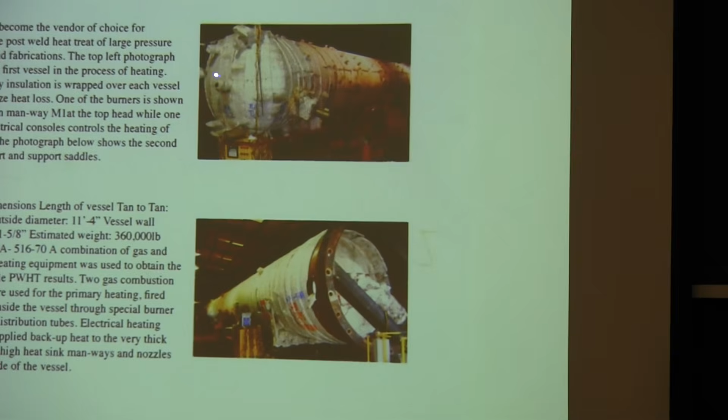Here's a vessel that they just wrapped. They put electrical blankets around it, virtually over everything, and then wrap the whole thing in insulation. Here's another one. If you search online, there's a bunch of pictures of on-site stress relieving.

And it has to be done - you either have to do thermal stress relief or mechanical stress relief if the things get very large, because the residual stresses get to be huge. I told you the story about the big weld with 400 little welds in it, from a piece that came off a 50,000 ton forging press.

They didn't do proper preheat or post-heat. They didn't stress relieve. They didn't peen - where you hit it with a little hammer every half inch of weld, going in and beating the surface to introduce mechanical stress relief by deforming the surface. That's the way we used to put together battleships with 14-inch thick armor. No one remembers exactly how to do it anymore, and no one wants to build a battleship just to prove it. We don't really know how to weld 14-inch thick armor steels anymore, because all those people are dead.

Did I tell you about the battleship Iowa down in Puerto Rico? One sailor was upset with another, so he set off a shell in the turret and destroyed it. The Navy didn't know how to repair it. Of course you don't need 16-inch shells anymore. They were firing shells made in World War II, and the last time we fired shells was in the 1980s, sitting off Israel, lobbing them into Palestine or Syria somewhere.

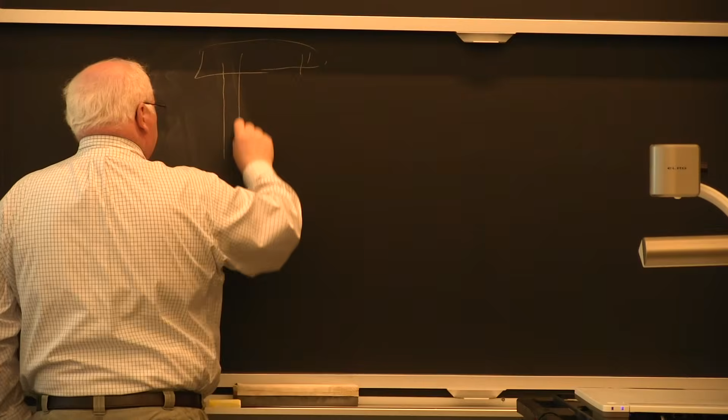But what happened at the Wyman Gordon plant, they had the press go up about 3 or 4 stories above the ground. When you walk into the plant, you've got these great big 4 rods. I'll just draw 2 of them. You've got the ground, and this goes up about 3 stories, 30, 40 feet high. And you've got this big set of beams up here. There are like 6 of these I-beams, and they're 10 feet high.

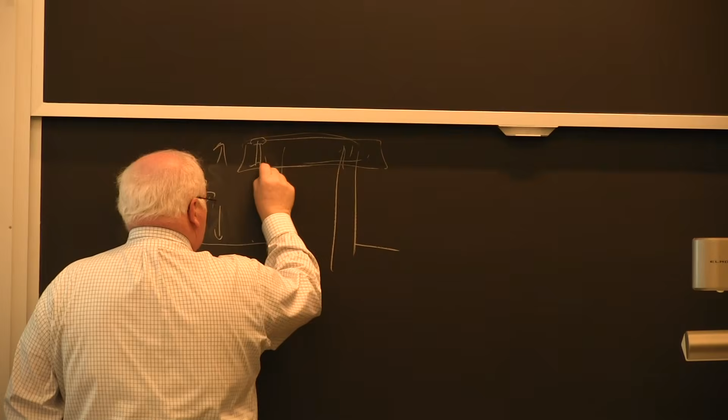That's a story right there by itself. And they're a 10-inch thick web, welded together out of big forgings. This is not a rolled beam, okay? This is 10 feet high and 10 inches thick, and they were about, I don't remember, 50 or 60 feet long.

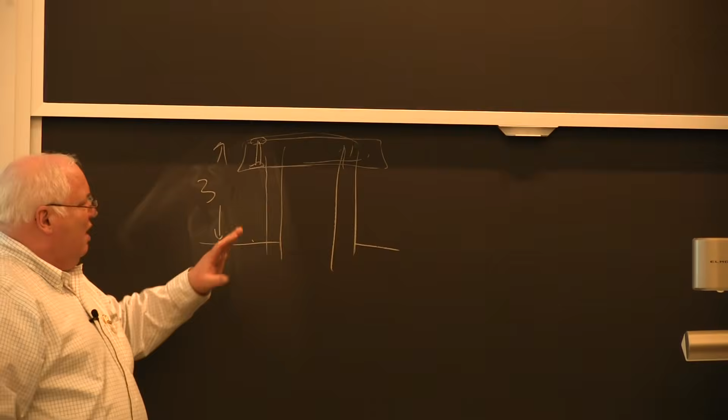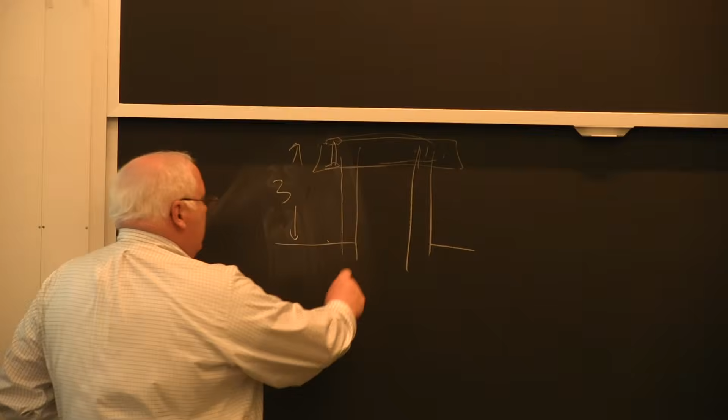You couldn't make the whole thing as one forging itself, because you didn't have a forging press this size until you built the forging press. Anyway, they went 6 stories into the basement. You had this anvil down here, a huge anvil that you're going to press against. For all the hydraulics and other stuff, you basically had this thing going 6 stories down into the basement in order to run these.

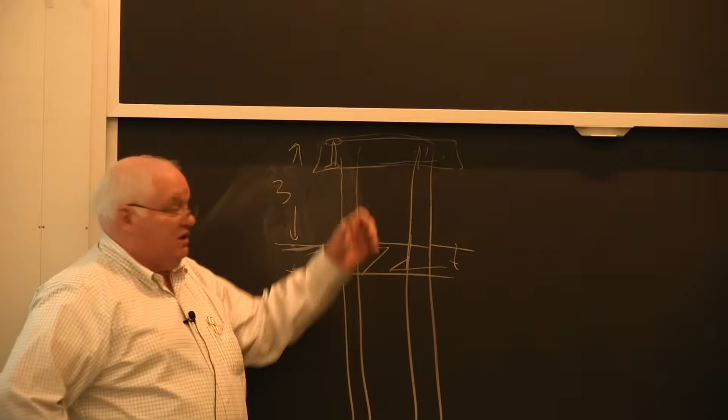This thing has to move up and down, right? So you've got to have another 3 stories going down, and then you've got all the other stuff. Well, the other I-beams down here, the same as that, were 6 stories buried in the ground.

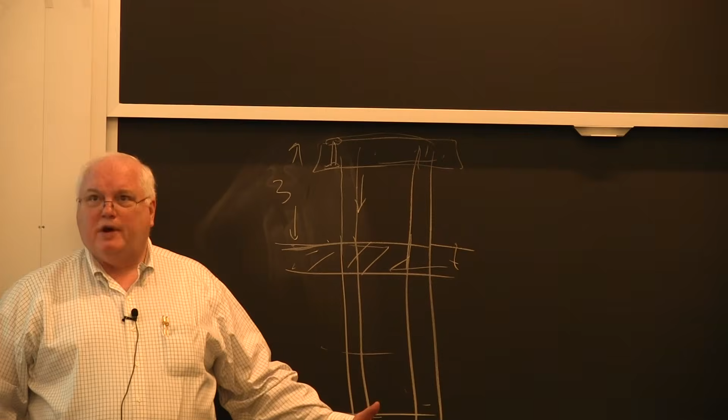One of them developed a crack all the way through. Someone was down there doing an inspection. They said, 'Oh, I see a crack, it's 10 feet long.' And they said, 'That's not good.' They had 6 of these beams. Well, they had to shut down the machine.

It turns out the beams, from the side, had a taper to them, like this. What they had done is welded on a little pad to erect this thing. When you're trying to put it in the pit down here, they had pads on either end just so you'd have something to sit on, because this was a 45-degree slope. They had welded these on. They were about the size of my notebook if you made it into a cube. They were not small, about 10 inches wide and stuff.

And they had welds on there that were 2-inch fillet welds, which means they had yield level residual stresses. This occurred in the mid-80s, so after 30 years of use, they developed a fatigue crack that started at the toe of one of these and went straight through it.

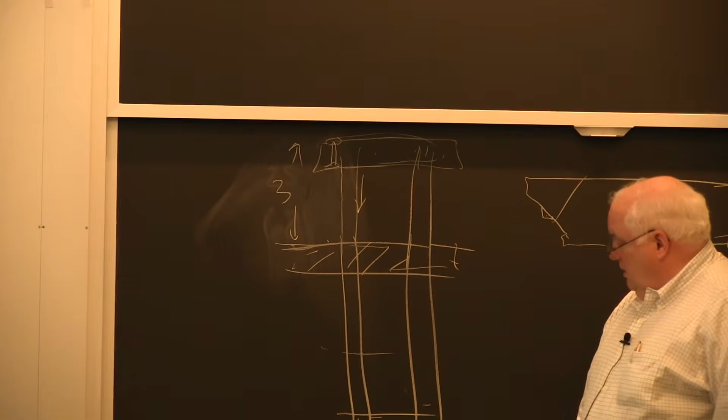A 10-foot crack. To build a new one of these, they estimated, would cost $2 billion. This is the whole thing, $2 billion, because it's not just the machine, it's all the hydraulic pumps and everything else. It fills a whole building, a huge building to do this. And we only had 2 of these in the United States, one at Wyman Gordon, now bought by the Germans, and Alcoa owns the other one.

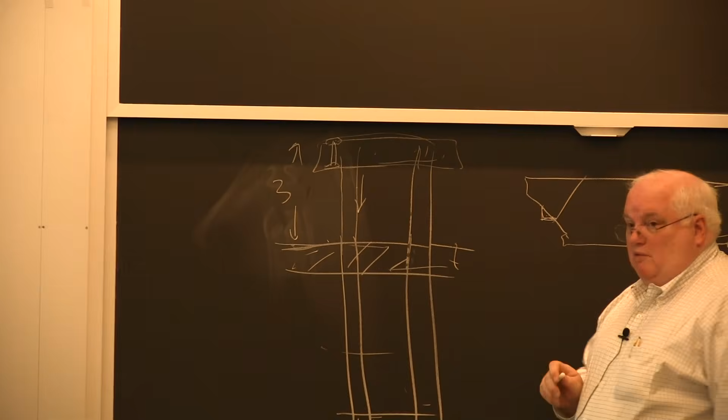Anyway, it was because of weld residual stresses. It wasn't a hydrogen crack. It was 30 years old, but it was weld residual stresses and the stress concentration.

The fatigue crack went through here, and I got to go down in the elevator and see this thing. It's a little bit greasy down there, about 2 inches of grease everywhere. But they had an elevator to go down there.

I looked at it, inspected it, and they said, 'Well, how do we weld this?' And I said, 'Well, you're going to have to preheat it.' I went through and helped them, we talked for a couple of hours about what you might have to do and how you're going to stress relieve it. I said the best thing for stress relief is if you can put it in a furnace.

Well, can't we do it in place? Because it's not the easiest thing in the world to get a 50-ton beam out of the 6th floor basement when the only access you have is an elevator shaft. In fact, they were going to have to disassemble a fair amount of this forging press in order to even get the beam out of there.

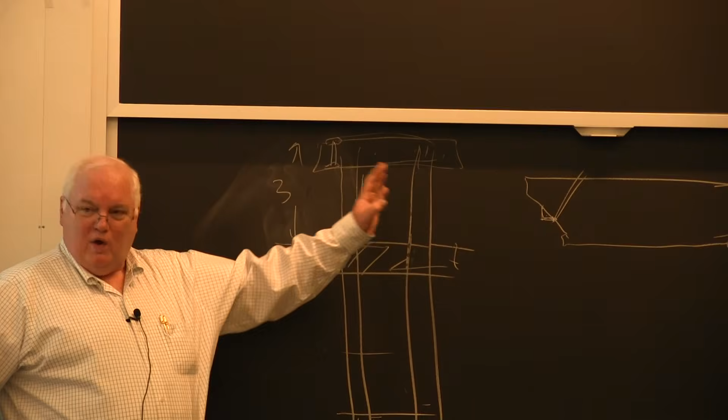Eventually, they did decide to spend the millions of dollars to rig it out, weld it, stress relieve it in a furnace, and put it back in. Cost tens of millions of dollars to make that repair weld.

They had to grind the crack open. This is a 10-inch thick piece, so this is going to be a 10-inch thick weld. So you've got the two pieces, and you have to prep the ends.

So we discussed weld prep. You saw the one I passed around, and you don't do a 45-degree angle because then you're putting in tons of weld metal. Do you do a narrow groove, a straight bevel, or a compound bevel, where you machine two different angles, or a J groove? There are lots of options. We were talking about how to minimize the amount of weld metal while still having enough angle to get good fusion. Go too straight and you won't get good fusion.

We do have something called narrow gap welding. The Japanese spend a lot of time and money on narrow gap. We use it on the surfaces of aircraft carriers—the top deck is 4-inch thick steel. We use narrow gap processes, but you have to develop the procedure. It could take you a year to develop a good, reliable narrow gap procedure. Yes, Jonathan. They could.

A new forging will probably have a 1.5-year lead time. They thought about that, but didn't want to be down for a year and a half, so they got it all turned around in about 3 months. They were doing economic analysis on whether to just buy a new one, but buying a new one doesn't solve it, because it was still welded together up there too—the flanges were welded to the beam, so you still had to weld it. The thing had been welded back in 1950. In fact, I found an article from 1954 in the Welding Journal about it, because it was such an unusual weld at the time—they made a special feature article about building these presses.

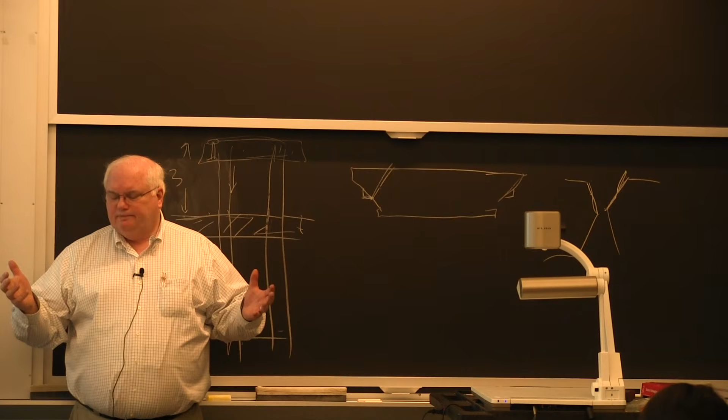Actually, not this particular one, but this forging facility in North Grafton—what was its name before Krupp bought it? It was Wyman Gordon. So Krupp buys Wyman Gordon, and Wyman Gordon at the time was forging crankshafts for airplanes—Lycoming, there's Textron Lycoming, and there's Teledyne Continental Engines. If you're a small aircraft pilot, like a Piper Cub or something, you have these $500,000 engines that are aluminum—I'm going to talk about welding the aluminum cases on one of those when I get to aluminum. Anyway, they have steel crankshafts because you need the strength of steel. You don't want the weight, but you can't get anything else with that fatigue life.

Krupp buys Wyman Gordon and starts looking at the order book, and they see—well, I don't know exactly how many—they might make 2,000 crankshafts a year for Continental and Lycoming, and they said we don't want this liability. We don't make enough money on 2,000 of these things, because if one fails, you've got a $10 million lawsuit. There are people out there who just love to sue any manufacturer of an aircraft. We could talk about that for half an hour, but Congress passed a law around 1994 called the General Aviation Revitalization Act, because Piper, Beechcraft, Cessna and all these companies were going bankrupt from all the lawsuits.

Whenever some guy fails to maintain his aircraft and ditches it, and kills himself and his family, maybe some other people, some attorney comes in and sues them. And they get tens of millions of dollars in front of juries because no one wants to even think about falling from the sky, right?

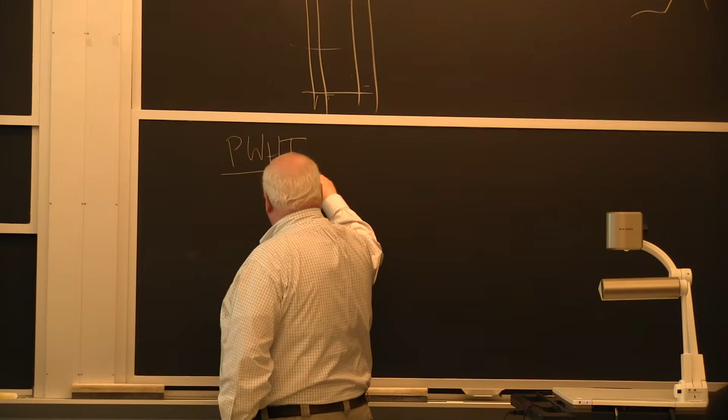There are three reasons to post-weld heat treat: temper the steel for lower hardness, you lower the hardness, and I like to just call it HV, Vickers hardness, but it can be Rockwell C, whatever. But anyway, you temper it, and you relieve residual stresses.

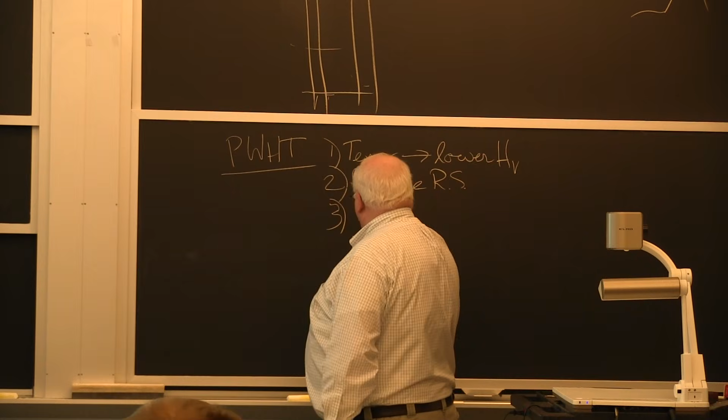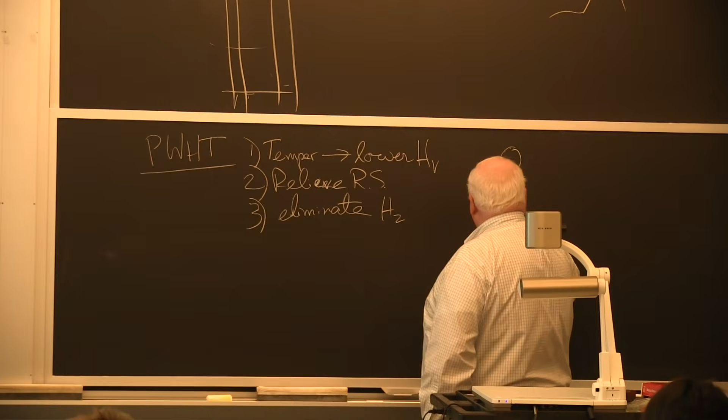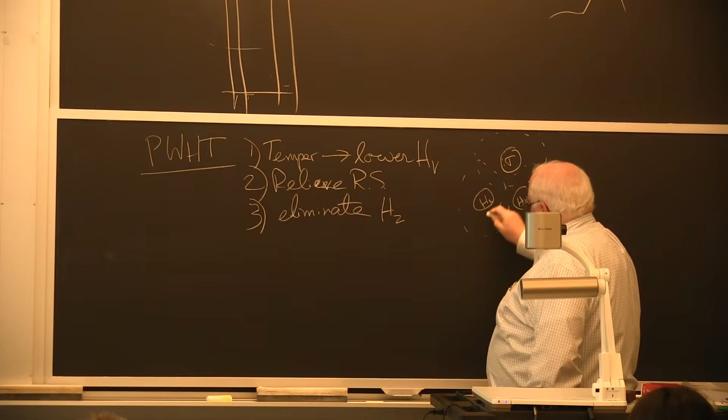And the third thing you do is you eliminate hydrogen. So on this one, if you think of the Venn diagram, I remember I had a little circle and a little circle—I relieved the stresses, I've reduced the environment, and I've reduced the hydrogen. I've reduced the hardness. So this is hardness HV, stress, and H2. By post-weld heat treatment, I do lots of good things, and if I properly post-weld heat treat, I probably won't get a hydrogen crack.

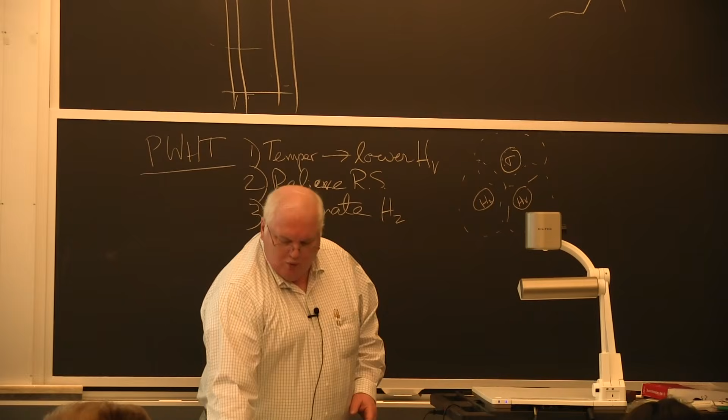And I told you about the Helms project, about that. Now, how do you do it? What procedures do you use? Mike Baumforth was talking about the structural welding code yesterday, and here are some of the welding procedures per the structural welding code.

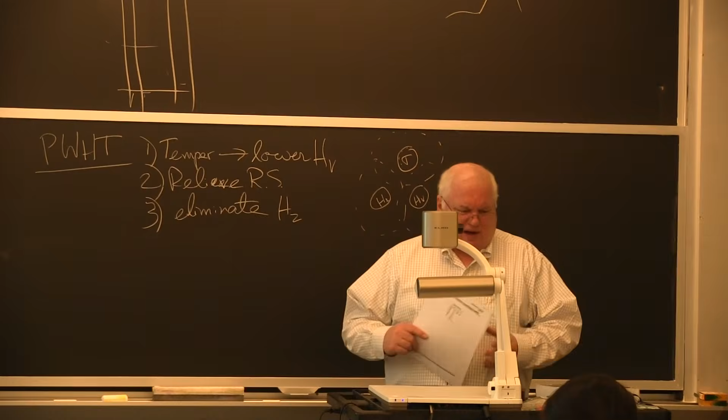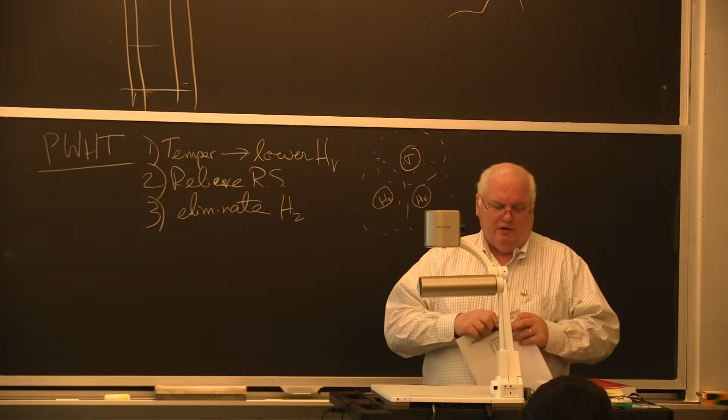Mike mentioned that you can take the certified welding engineer exam by either doing the standard of API 1104 or the structural welding code. There's another code, and he showed you the API 1104, which is this little thin thing, but actually it's more complex than this one. The other code that's used most often is the ASME boiler and pressure vessel code. The problem with the ASME boiler and pressure vessel code is it's this thick.

If I take all the parts of the ASME boiler and pressure vessel code, you don't want to take a full day exam or a 3-hour exam on it. You probably need about 5 years of daily experience to understand the boiler and pressure vessel code. It's sort of like the US tax code—there is no one who understands the whole thing. It's just a little too complex. It's the granddaddy code, like 105 years old, and it is the highest quality standard, because if a pressure vessel blows, it does really bad things.

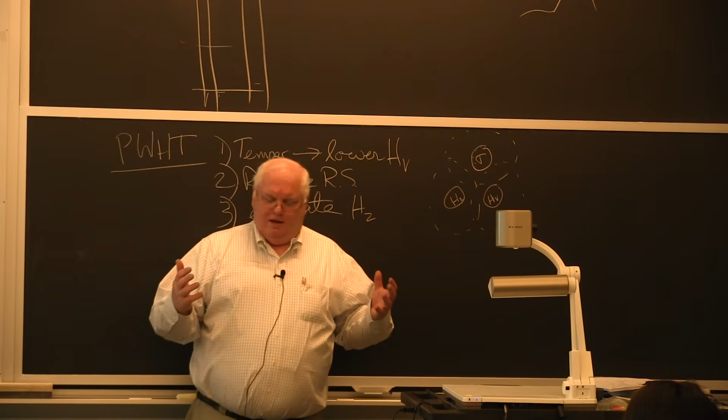Which leads me to another story. So a few years ago—it's like 15 years ago, oh no, it's 20 years ago now—I'm sitting in my office. I was actually department head at the time, and I get this call that they had had an explosion up in North Andover.

Well, Ron may have done it later. They actually took me out of it because I became sort of a fact witness. I was one of the first two people down in the pit when they finally cleared out enough space, and they had a crane. The other guy was the chief engineer for Travelers Insurance, and I was the other guy. We were the two guys who got down there first to look around and say, a lot of trash down here. Okay, that's about all you can see, okay?

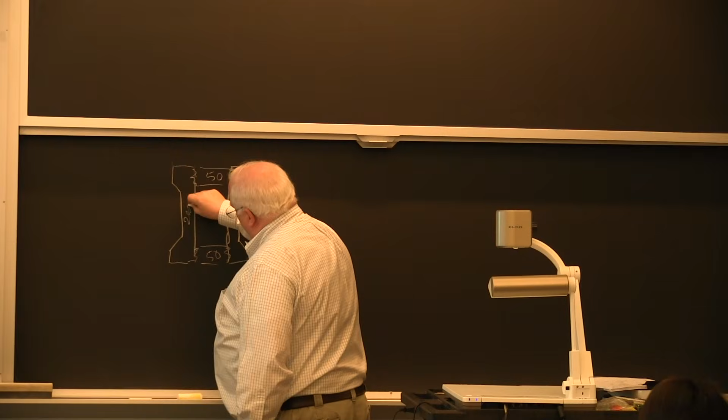But anyway, so this pressure vessel was a hot isostatic press, and it weighed about 300 tons. And it had a shape, it was threaded at the top. It was also threaded at the bottom, and the top cap and the bottom cap were 50 tons each, and the cylinder was 200 tons, as I remember. Okay, and this was about, I think it was about 10 or 12 inches right here, and it opened up here to about 28 inches at the top.

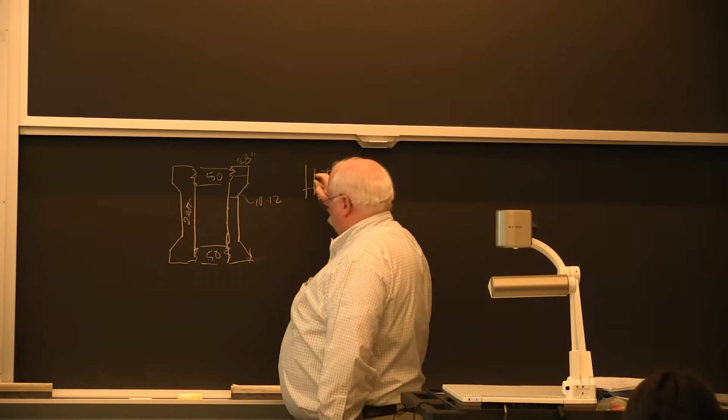And they had designed this in the mid-'80s on a Cray supercomputer. Okay, a Cray supercomputer is probably a $500 PC today, okay, in terms of computing power, but they had done all the thermal stresses on this. This is a hot isostatic press, and if you take my thing on casting and it ends up a little bit on forging, I'll probably tell this story on that video, maybe in a little more detail. But it had been operating for a number of years.

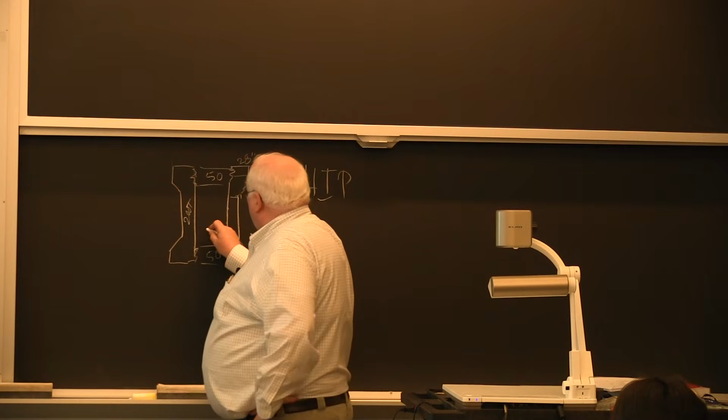The inside diameter was 60 inches, and it was probably 20 feet tall or something on the inside. It wasn't a small vessel. It weighed 300 tons, the whole thing.

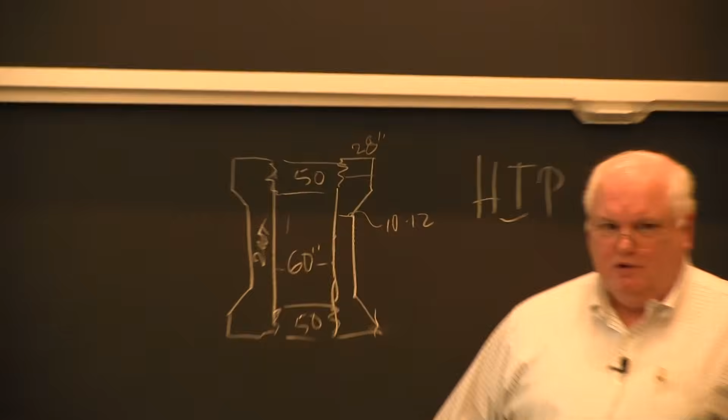It had been forged in Japan by Japan Steel Works, one of the only places in the world that had both the steel making technology and a big enough forging press to do this. We had big forging presses, but Alcoa doesn't forge a lot of steel in Cleveland. Wyman Gordon, you'd have to make the steel over in Japan and then bring it over here. The Japanese have some, I don't know, maybe 30,000 ton forging presses.

So they had forged the pieces, and you basically usually make something a little bit longer. They call it a prolongation on the forge. And so you can cut it off, and you can cut out tensile specimens, Charpy impact specimens. You can do all your quality control tests on the heat treatment. So they did that, except it failed the mechanical properties after the heat treatment.

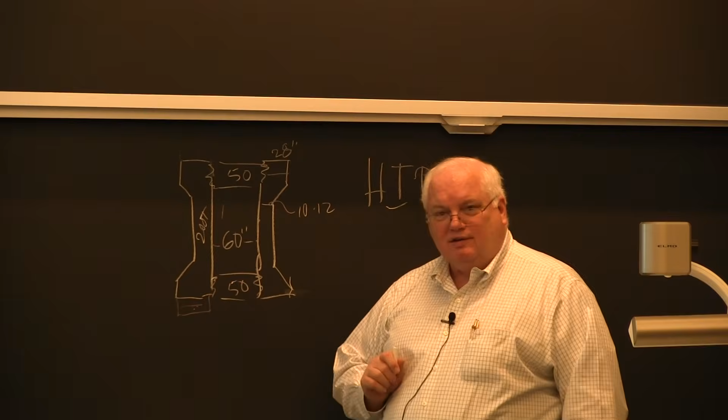Darn, okay? I could scrap it. That's only going to cost me $20-30 million. Or I can just reheat treat it. Now, how do you reheat treat it? Well, you don't have exactly the same chemistry. Well, you take something that's very similar to it. You can't weld on a prolongation, okay, on something like this.

So you just take a piece of the material and you put it in next to it in the furnace, okay? But that doesn't cool exactly the same way as this piece. I mean, this one's 200 tons, this one might be 2 tons. And so they cool differently, they get different grain sizes. This one, the second time they heat treat it, passes. Great, okay, ship it, okay? So they do.

And it goes out, and it's a hot isostatic press. They used to put Harley Davidson, in fact, I remember walking around the rubble of the building, okay, from the explosion, because it just wiped out the whole building. They had a bunch of Harley Davidson aluminum cylinders, and they would go through, they were cast cylinders, and they would hot isostatic press them to get rid of all the shrinkage porosity from the casting, because guess what?

When you're on a Harley Davidson motorcycle, guess what's right between your knees? Okay, and if it blows up, okay, not a good day. So they have very stringent quality control standards for these piston cylinders or cylinders.

So they put in a bunch of these in a rack and they heat treat it. It takes about a day to do a heat treatment. In a furnace like this, probably costs a couple of $1,000s an hour. So you're talking, well, maybe only $1,000 an hour back then. But so you might be talking $25,000 heat treatment. So you put more than one cylinder in, but you know, you put a bunch of cylinders in.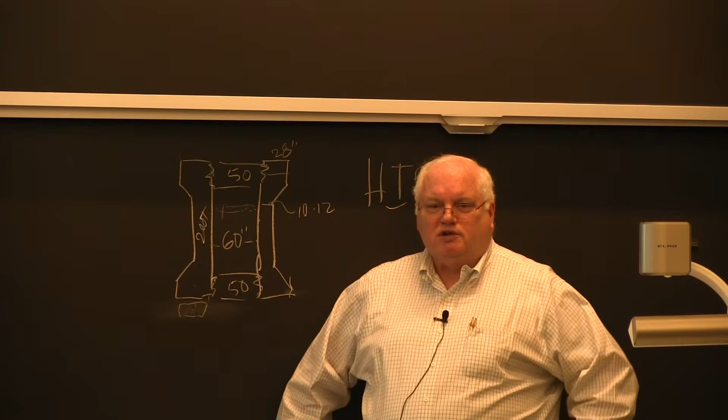So about 3 years before, they had started ordering another one. Fortunately, when this thing let go, the other one came on stream 3 months later. Otherwise, it would have been 3 years before anyone in the world could have built an engine - Pratt & Whitney, Rolls-Royce. Think of the damages here. So fortunately, they had the other one almost ready to go, and they replaced this one. Because there was no other unit that could take something that big around.

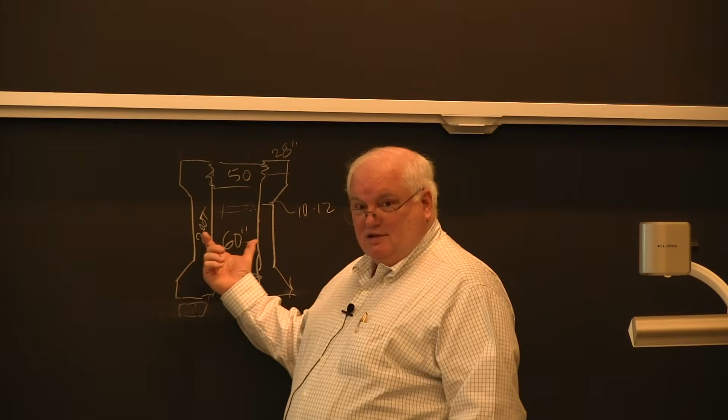But anyway, so it lets go. But why did it let go? Well, it turns out it's partly a hydrogen cracking story. It's not a welding story, but it's a hydrogen cracking story.

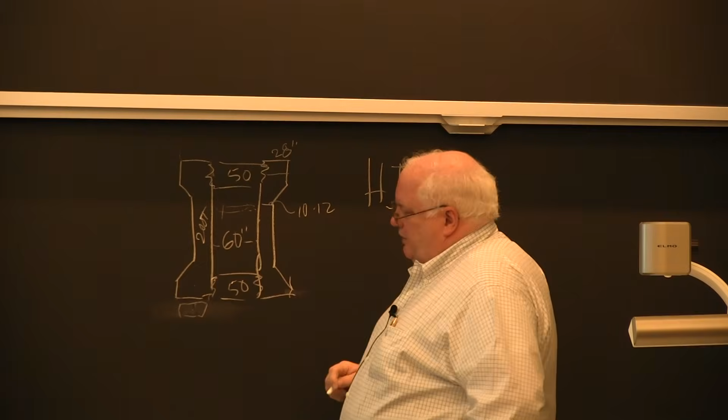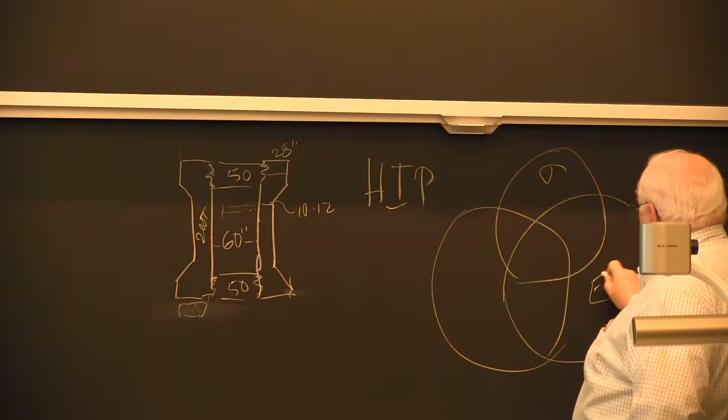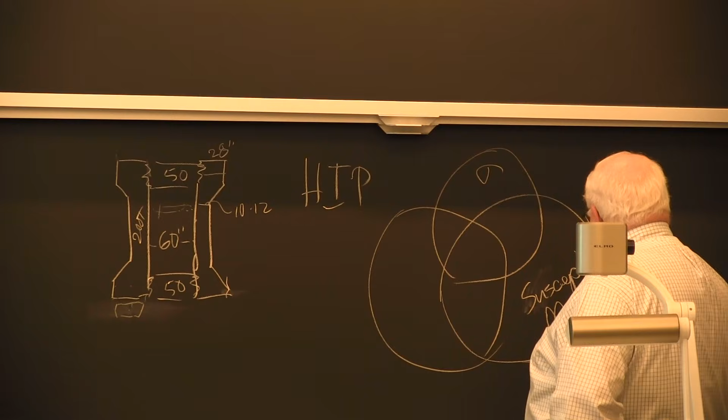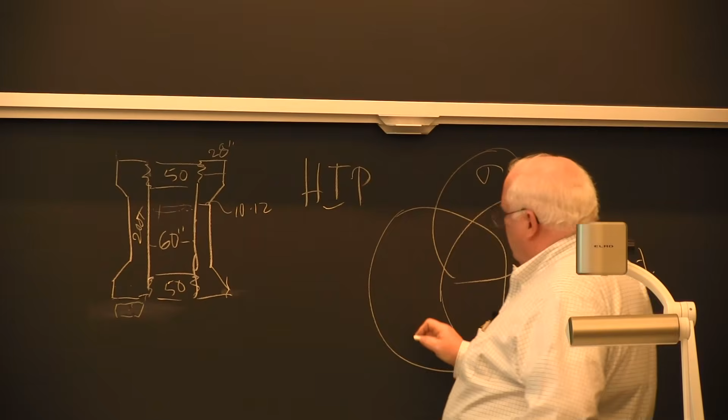There were 3 things. They called it stress corrosion cracking, so I might as well call it that. In stress corrosion cracking, you have to have a stress, you have to have a susceptible microstructure - so it's not hardness, but it's sort of the same thing - high hardness, susceptible microstructure, in this case low toughness. And then you have to have a source of hydrogen, and you'll get stress corrosion cracking.

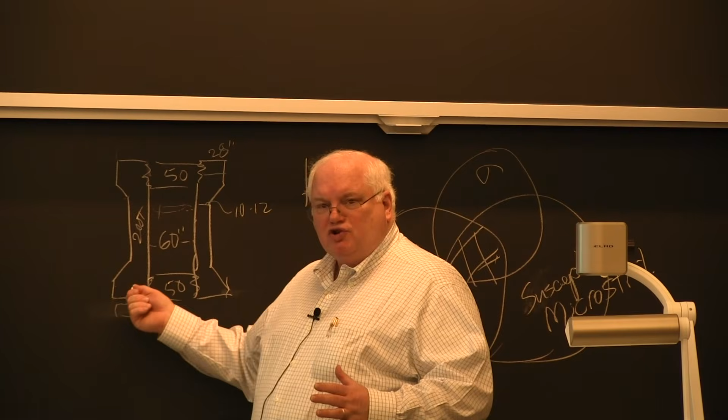Well, if you did the fracture mechanics on this thing originally, it had about a 12-inch critical flaw size if it had the toughness it should have had when they did the heat treatment. But it didn't have that toughness. They took Charpy samples out and it failed. So they redid it, and this little piece passed - it had enough toughness.

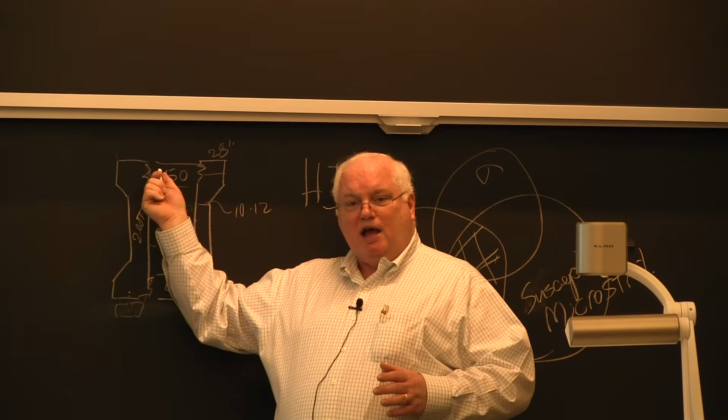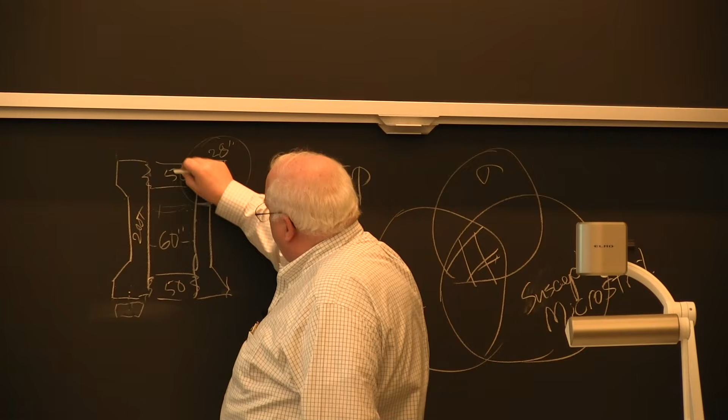But guess what? When they went out to test this thing after it exploded, one of these pieces - that piece right there - the crack ran right from that corner, a stress concentration, and it just ripped off a piece about a third of the way around. It weighed 16.5 tons, and it was found a quarter mile away. It took a lot of energy to move 16 tons a quarter mile.

Another 5-ton piece - actually we pieced the whole thing back together. Not actually, if you want, I'll tell you how you piece something like this back together - you don't piece it back together, you don't pick up 5-ton pieces. But it was in like 70 different pieces. So basically the average piece - 200 tons, 70 pieces - that's 3 tons per piece, right? Pretty heavy.

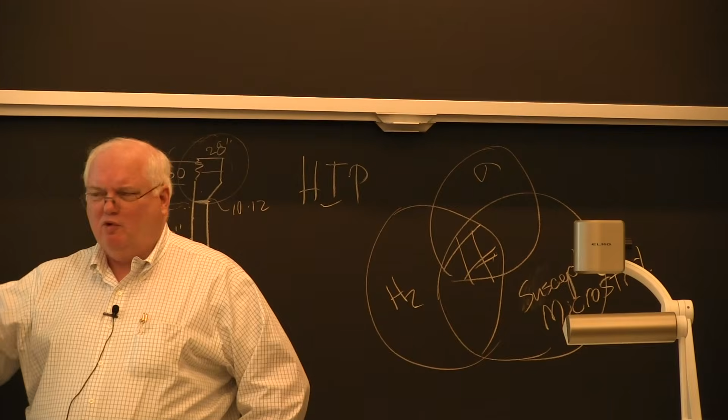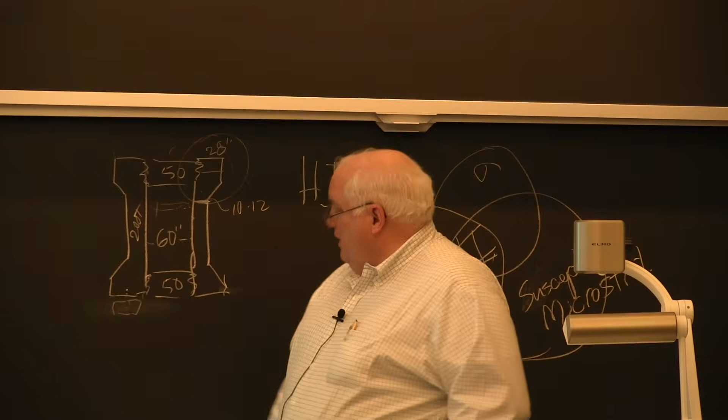One 5-ton piece landed right on top of the operator's chair. It happened at 2 a.m. in the morning. This thing runs 24/7, right? The operator had just gotten up seconds before to go change one of their chart recorders, the paper on the chart recorder. If this had happened 15 seconds earlier, he would have been underneath the 5-ton piece. He was sort of rattled, but it landed right there next to him. Anyway, the chair was not in very good shape.

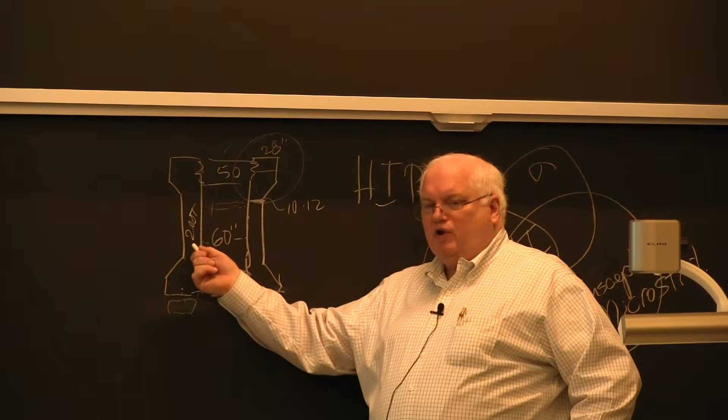Anyway, what happened? With fracture mechanics and everything, you try to design something like this for leak before break. Leak before break means if you get a crack, it will grow and grow until eventually it creates a leak in the vessel before the vessel just blows up as a brittle fracture. You want it to leak before it breaks - break before leak's not good, no warning. In fact, if you read the ASME code for pressure vessels, they actually impose duties to have a leak that warns you something's happening in the vessel, that it will leak before.

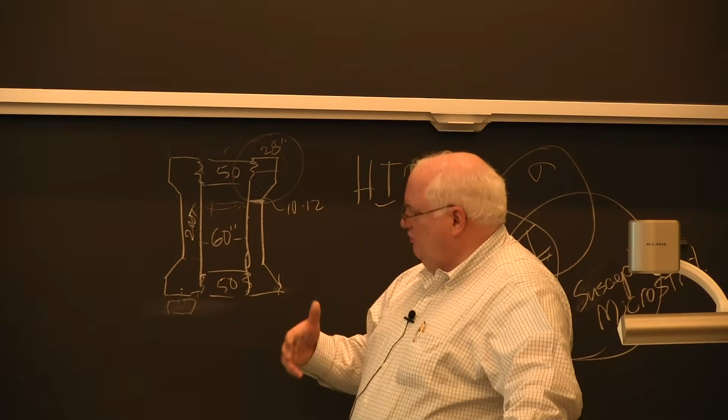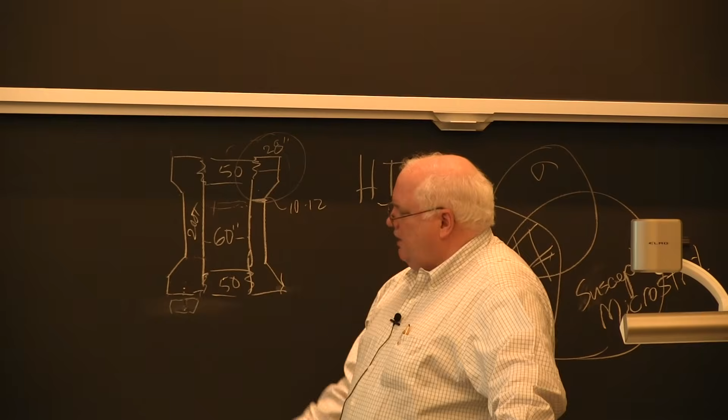And actually, typically the leak - this thing has 20,000 psi argon inside it. So the argon is compressed as a gas, but it has a density like liquid, if you start calculating 20,000 psi and stuff on argon. But anyway, using all this, it should have had a leak before break of something. It should have leaked before breaking on the original design if it had the toughness. The toughness is equal to...

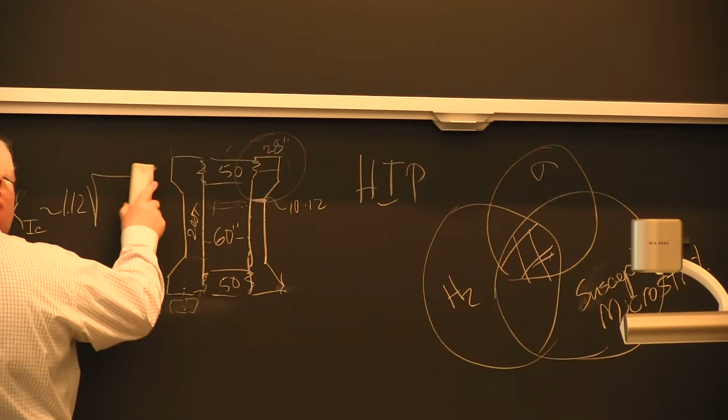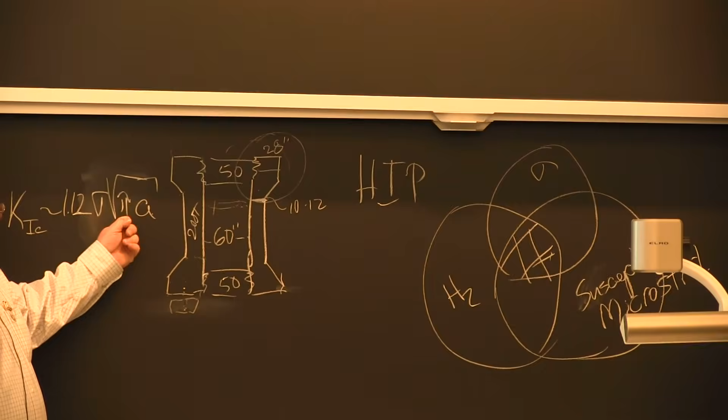K1C is proportional to - I'll just call it, if you want to be precise, but it's not precise - sigma, square root of pi a, 1.12 for a planar crack. Stress times the square root of pi times half the crack length, or half the crack depth - a would be the crack depth. It should be about 10 inches or greater. Pi is the constant, sigma is the stress. We know what the stress is when you're under 20,000 psi. They've done this finite element model.